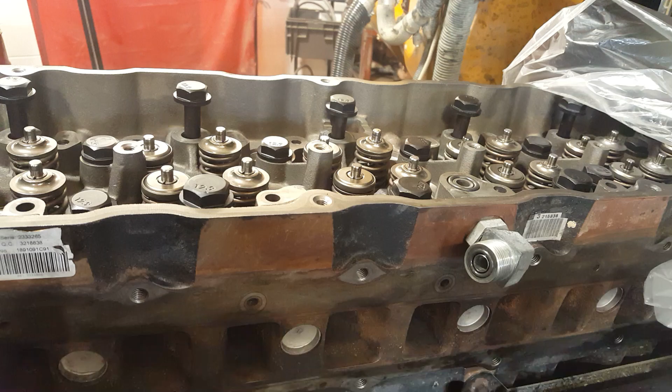They got the head on, our DT MaxxForce, and the machine shop. We sent it down there, they hot tanked it, checked it over, and machined the surface so it's good and flat against the head gasket, and replaced the valve seals. They said it's in pretty good shape, no cracks, nothing major. So let's go over to the manual and look over the torque sequence.

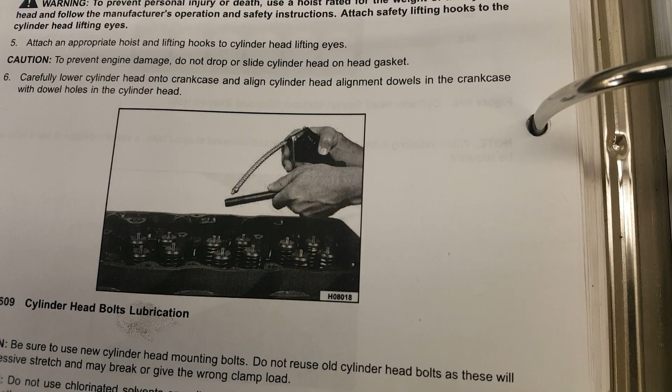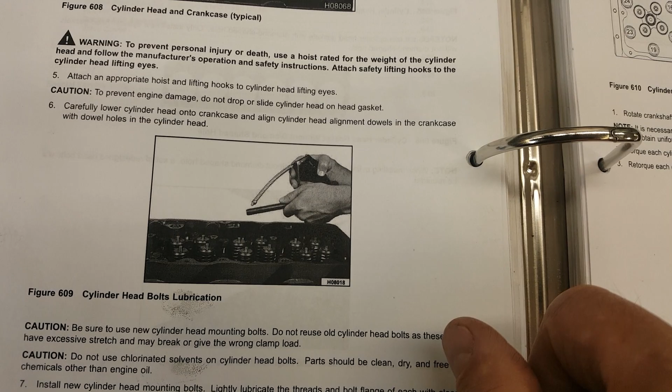Now, looking at the manual: lubricate the threads, replace the head bolts because they stretch. This is a torque to yield, final torque, so to play it safe, if you get any stretch, you're not going to clamp that head down the way it should be with used bolts.

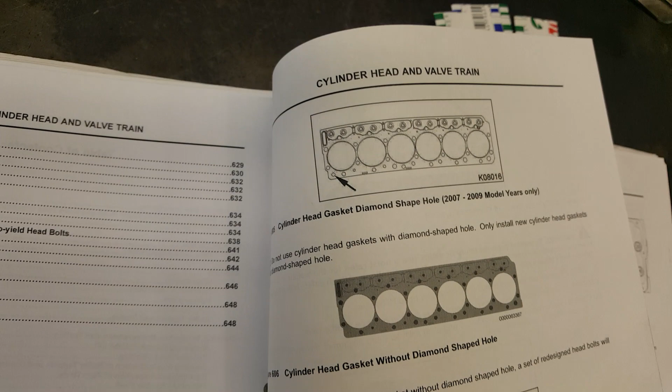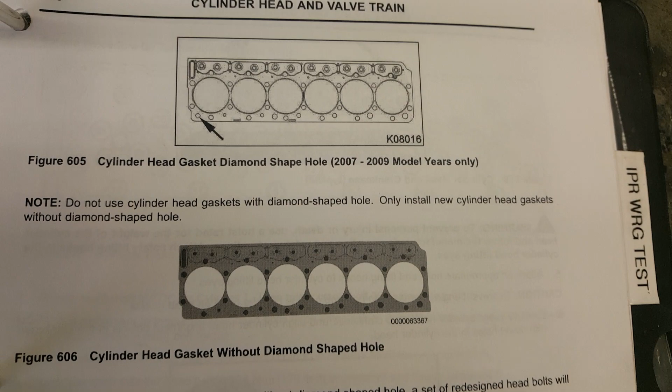There's also another page here I noticed. You do not use the diamond shaped hole style head gasket. Use a head gasket without the diamond shaped hole. So it's good to know, I guess, because you can have trouble if you use the wrong head gasket. It's a lot of work, so you want to be sure, right?

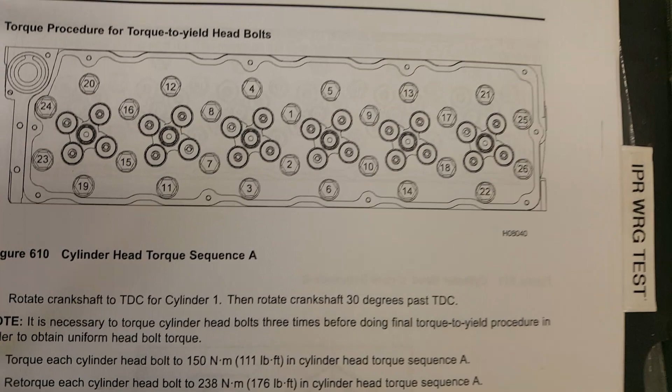So yeah, torque sequence, typical circular pattern, middle out. The first torque is 111 foot-pounds. Second torque is 176 foot-pounds. And the third torque is 176 foot-pounds again.

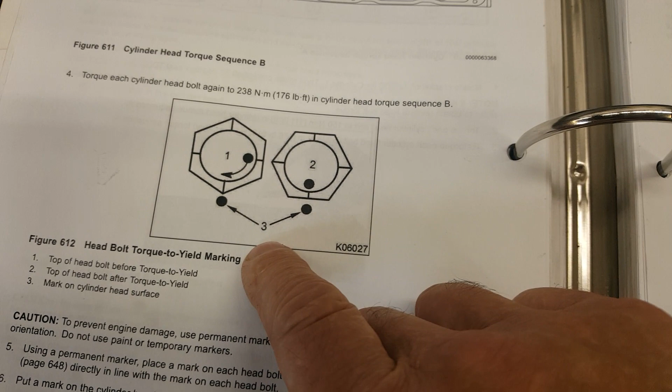Foot-pounds at the final stage is a torque to yield. It's a quarter turn, or 90 degrees. You just mark the bolt and give it a quarter of a turn.

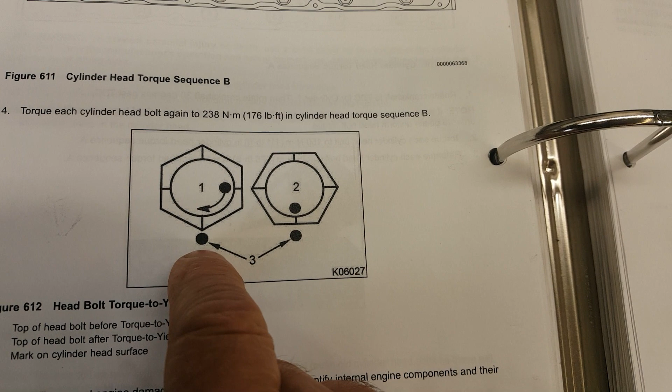Following the torque sequence, and you're good to go, no problems. Follow this sequence carefully. Don't skip any steps, and you won't have any worries at all.